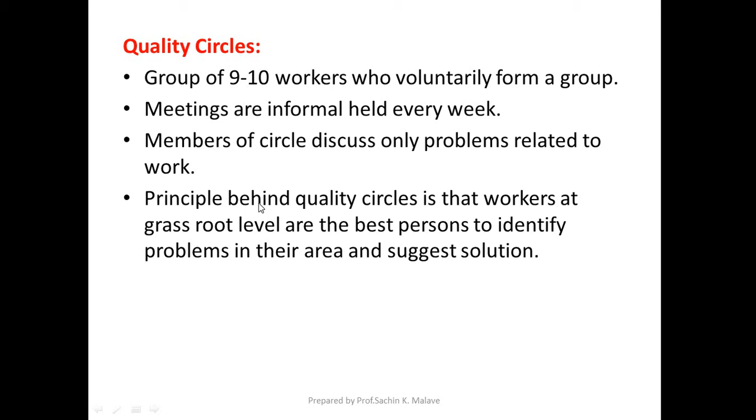We can experience this everywhere. Workers who are working can identify the problems in their area and they can suggest the solution also. So why not take advantage of this situation, why not take the knowledge from such workers? Believe me, the solutions suggested by these workers are very good solutions. Many times the solutions given by the workers are better than the solutions provided by the shop floor managers or engineers. This is the principle behind the formation of the quality circle.

As you can see, the objectives of the quality circles are to involve the grassroots workers in quality improvements and solve their problems, just as we discussed. The objective is to improve the quality.

Then, to make workers more conscious about quality and cost of the product. If the workers discuss the problems related to their work, they will also get conscious about the quality and the cost of the product. They will become more and more conscious. That is the second objective.

Third, to provide opportunities to workers to get trained in identifying technical problems and working out the solutions. You are providing the opportunity to the workers to get trained so that they can identify technical problems and solve those problems in future. They don't need to wait for the expert to come and solve their problem, otherwise production will be hampered.

The next objective is to enhance employee motivation, self-confidence and communication skills. As the workers get involved in the solution of the problems, it will definitely boost the motivation of the employee, because they will feel proud about giving suggestions, they will become confident, and their communication skill will also improve.

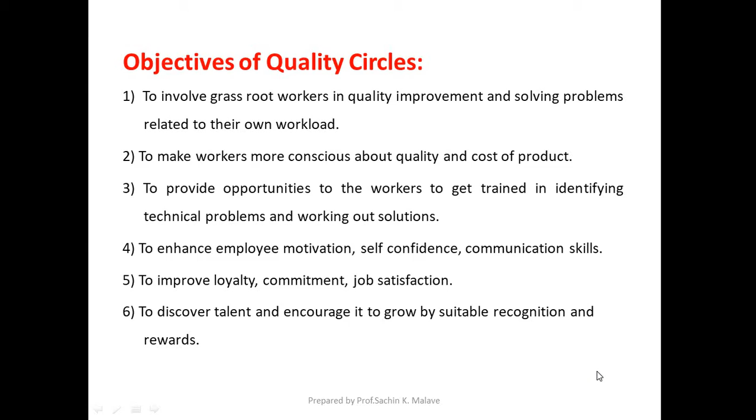Okay, CNC machine section is there. So there may be different sections, and a group of lathe machine workers may be facing some issue. They may feel a problem like whenever they are carrying out machining of certain components, they have observed that the surface finish is very bad during machining, or the tool inserts are getting broken, or they are getting worn out quickly compared to previous times. So such type of problems.

So if everybody is facing the problem, they can discuss it. What may be the reason? So they will first select the problem to be discussed. There may be a number of problems, so it's not possible to discuss all of them simultaneously. So they will decide the priority of the problems and discuss them in that priority.

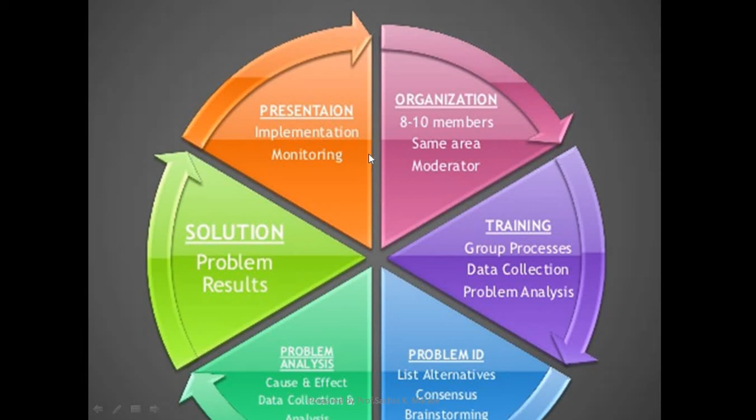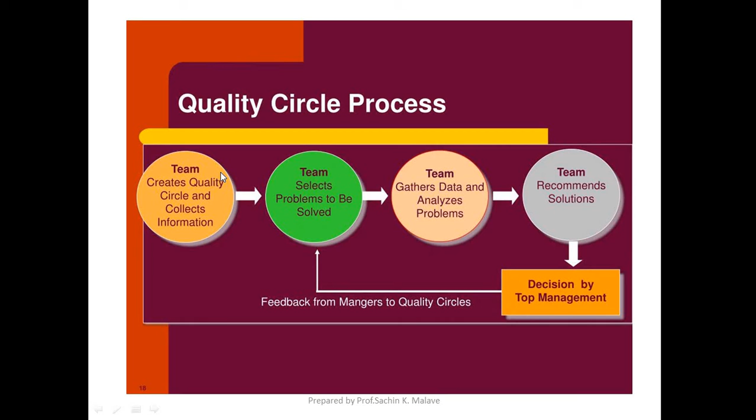Before going to the next section, we have already discussed the objectives of the quality circle, and if those objectives are achieved, then the quality circle is definitely helpful. Some of the advantages are higher quality of the product, higher productivity, lower cost, less rework and less scrap, better use of resources, leadership development, and identification of workforce talent.

But there may be some limitations of the quality circle also. So what are those limitations? One limitation is the time and cost involved in training a large number of staff members. You are supposed to give training, if required, to the quality circle members also, so the time and cost involved in such training may be too large.

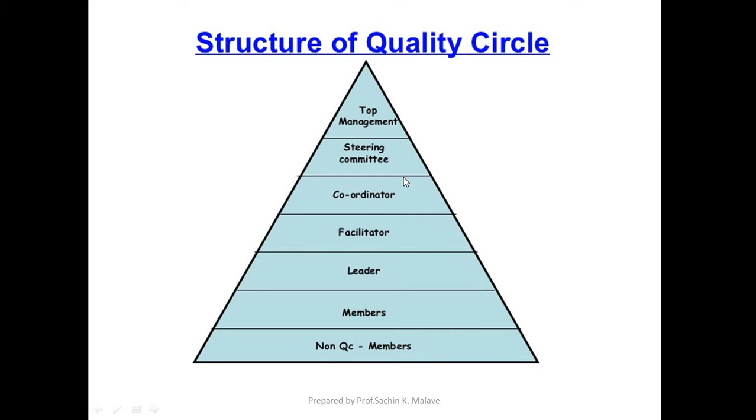So this ends the quality circle. Now we have to see one more concept, that is the importance of quality deployment, at design and manufacturing.

So here the meaning is you have to build the quality instead of checking the quality in the product or in the service. You have to try to build the quality in the product at design and manufacturing, because these are the two most important stages of product life.

At these two stages only the quality can be deployed. The majority of the quality will be implemented or built at these two stages only. So the basic objective of this concept is to satisfy the customer.

We know that if the customer is not satisfied, the part will get rejected, isn't it? Many times your entire business depends upon the quality of the product, and the quality of the product is going to build a brand name. In future, if once a brand is established, the customer will purchase the components looking at the brand only. The brand is the symbol of the quality of your product.

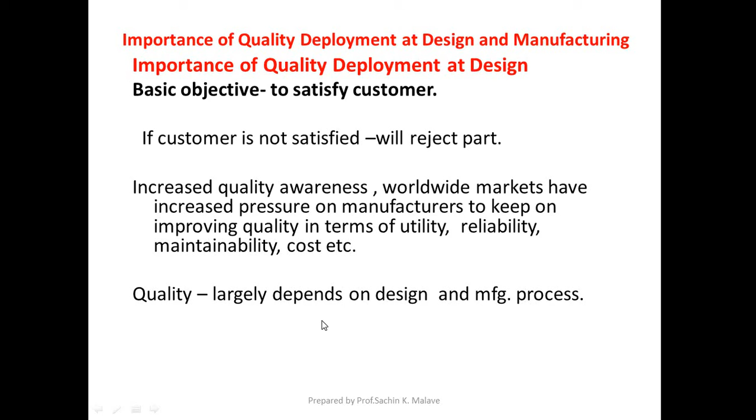Once we know that the quality is to be improved, we know that quality largely depends on the design and manufacturing process. The designer specifies the material, size, shape, accuracy and finish required for the product.

The designer is going to specify these things: what kind of material, what kind of raw material is to be used, what should be the size, what should be the shape, what kind of accuracy and what kind of surface finish is required. All these things are specified by the designer at the time of designing the component.

Because all these things matter a lot in deciding the quality of the product. Once the designer specifies everything, it is the responsibility of the manufacturing section to produce the parts as per the specifications. So if you want to improve the quality, you must begin with the improvement in design and manufacturing process.

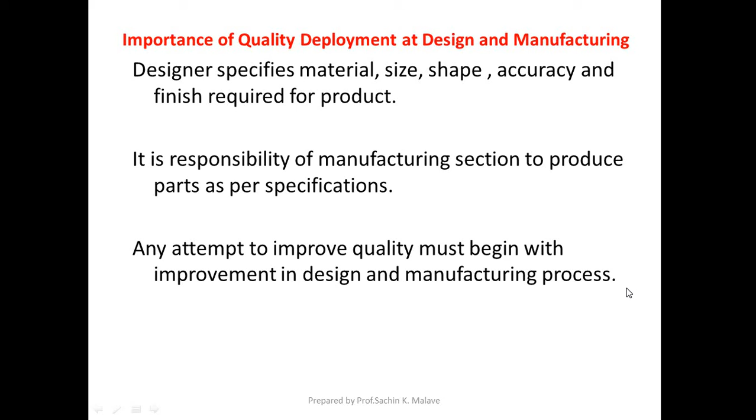Whenever you are thinking to improve the quality, you have to think of making changes either in design or in manufacturing or in both possible. So you have to first identify and proceed accordingly.

Design for manufacturing is a must for economical manufacturing. Whenever you design something, you should design from a manufacturing point of view. Whatever you design, it should be manufacturable. Don't design things which are not possible to manufacture. So focus on simplifying the design to make it producible. It is a complete approach to production of goods that integrates the product design process.

The product design process starts with the selection of material. This is the most important part of your quality improvement technique. The raw material is going to decide the function of your final product, how it is going to function, and what kind of quality is going to be built into that final product. This is decided basically by the raw materials, because these materials will impart the required qualities.

So selection of the material is very important. It is going to decide the service life, resistance to the applied load, and safety against environment. The material is also going to decide various properties, mechanical properties, chemical properties, isn't it? That's why selection of the material is a very important thing.

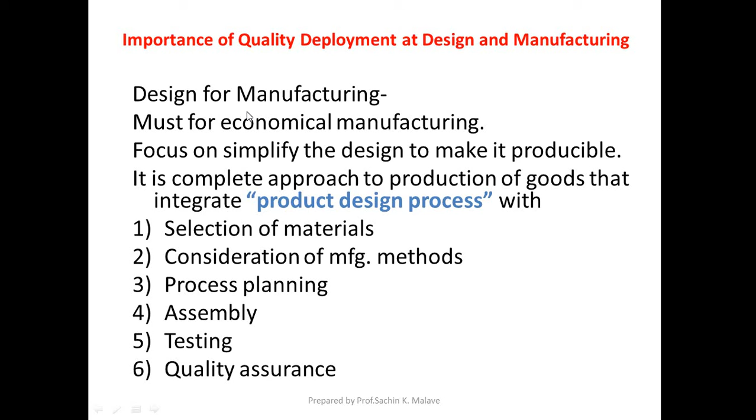Then process planning has to be done properly: assembly, testing, and quality assurance. So the product design process starts with this.

Then the designer must have knowledge of materials, manufacturing methods, machinery, and equipment. Designing is the most important step, so the designer must have knowledge of material — that's why you learn material science and metallurgy. The designer must have knowledge of manufacturing methods — that's why you study manufacturing technology, workshop technology, production technology. The designer must also have knowledge of machinery and equipment, because the designer is going to decide everything.

What kind of material is to be used, which manufacturing method is to be used, what kind of machinery is required — because machinery is going to decide what kind of quality will be produced. Process capability is basically related to the kind of machinery and equipment used for manufacturing as well as inspection. So the designer must have knowledge of all these areas.

Some design principles that should be implemented: the design must be simple, it should be possible to manufacture. As I told you, whatever you design should be producible. Sometimes whatever you design is very difficult to produce. It should also be simple to assemble, disassemble, service, and recycle. These are the basic principles of design.

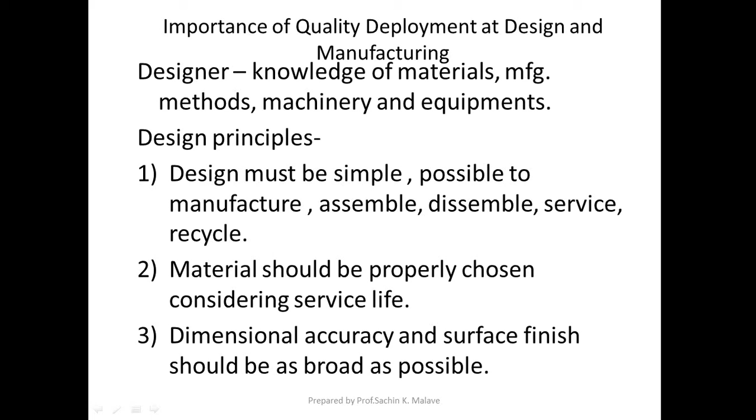That was related to the importance of quality deployment at design and manufacturing. Now, initial planning for quality.

The basic objective is decided in advance. Whenever you are planning for quality, the basic objective should be decided in advance. Planning means you are deciding in advance — what is to be decided in advance? What to do, when to do it, how to do it, and who is to do it. That is related to planning.

So what activity is going to be carried out, when that activity is going to be carried out, how that activity will be carried out, and who will carry out that activity — all these things have to be decided well in advance.

So you review the product design and process design. Whenever you are planning the quality, you review for the product design and process design. Under this comes identification of the product and process, review for the product design and process design, identification of the product and process, and analysis of the process flow. We are going to see all these things in detail, and understand how they are related to quality.

Understand the interrelationship of process variables, determine process capability, make the process mistake-proof, validate the measurement process, and plan for operator self-control. We will see these things one by one.

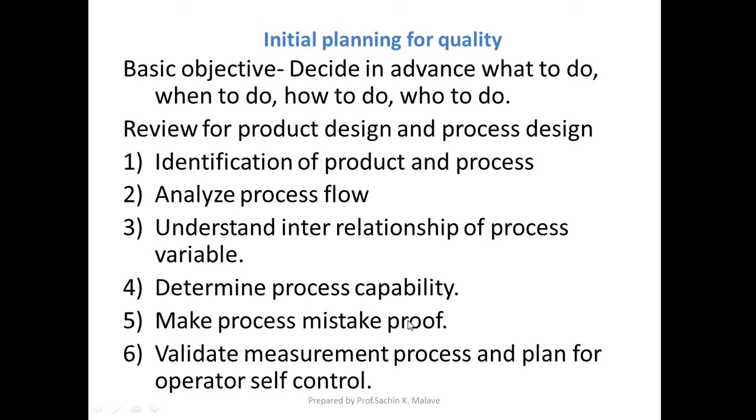What is the meaning of this? Reviewing the product design and process design means the focus is on how adequate the field performance is — you are going to check whether the field performance is adequate or not. So how will you decide, how will you identify this?

Identify the key product and process characteristics. Key characteristics mean important characteristics. So if you say you want a quality product, what kind of characteristics are you looking for in that product? Those characteristics are called key product characteristics or important product characteristics.

You have to identify such product characteristics. The customer is going to express his expectations, but the expectations of the customer are not in terms of the product characteristics. So it is the duty of the designer or engineering organization to convert the expectations of the customer into key product characteristics. So the organization has to decide what kind of characteristics will be required so that the product will satisfy the needs of the customer.

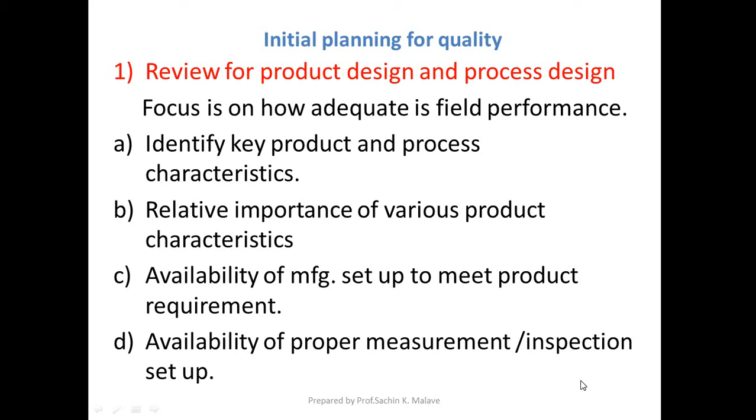Check whether the special needs like handling, transportation and storage are available with you or not. Sometimes special handling, transportation or storage requirements are there, so check for those special storages.

Then material control, segregation, identification and traceability. So you have to discover whether segregation facilities are available with you or not. There should be proper identification and traceability, so that even if some kind of failure takes place, your organization should have the mechanism to identify the defective components. Traceability should be there.

Special skilled personnel — check whether special skilled persons are available with you or not, that is to be checked.

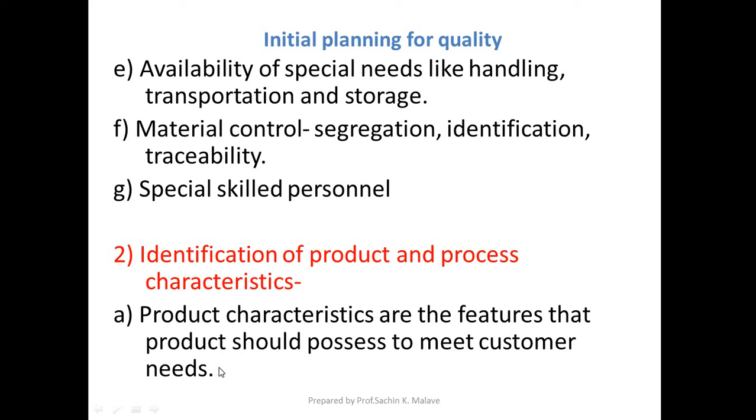Then identification of product and process characteristics means what? Product characteristics are the features that the product should possess to meet the customer needs. So I briefed you on what is the meaning of the product and process characteristics — these are the features that will meet the customer needs. If these features are included in that particular product, the customer will be satisfied, or the needs of the customer will be met.

So how to identify such process characteristics? These process characteristics will be identified using inputs from market research. Market research can be carried out by various techniques, and from that market research analysis you can find out what the customer needs. Then quality function deployment — what is QFD.

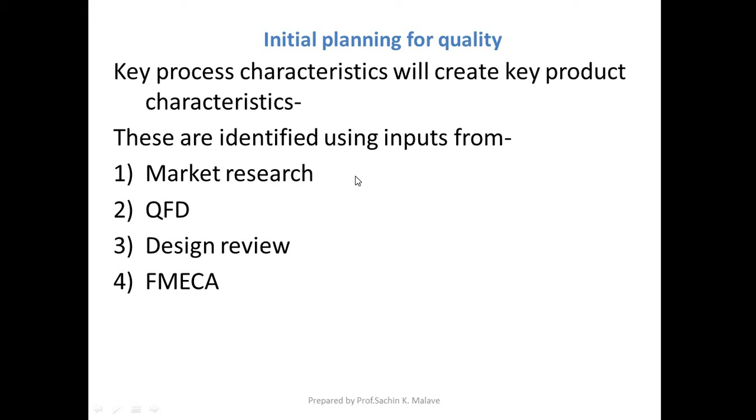From QFD we can get design review. If we review the design, you can get the key characteristics. Then FMECA, that is failure mode effect criticality analysis — from this analysis also you can get the important characteristics which are a must. Key means must characteristics. If these characteristics are installed in your product, the product will meet the customer needs.

So that was the second thing. Analyze the process flow — what is the meaning of analyzing the process flow? The planner, whoever is planning the activities, will use the flow diagram to divide the flow into logical sections called workstations. A product, whenever you are manufacturing it, is going to pass through a number of processes, and each process will be carried out at some workstation.

For example, take the example of casting. For manufacturing casting, various processes are there, right from the sand plant. If you are making a sand casting or green sand molding casting, the sand plant is one workstation. Then it will come to molding, so the molding section is another workstation. Then there is a pouring section, so that will be another workstation.

Fourth is melting, so that will be another workstation. Fifth is fettling, another workstation, and so on. So the planner uses the flow diagram to divide the flow into logical sections, called workstations. So for each station the planner is going to prepare a formal document called a process sheet, prepared for each and every station.

So the process sheet contains the standard operating process. If you take the example of the molding workstation, there is a process sheet for it. For the sand plant there is a process sheet. For the melting section there is a process sheet. For the pouring section there is a process sheet. So for each workstation a process sheet will be given.

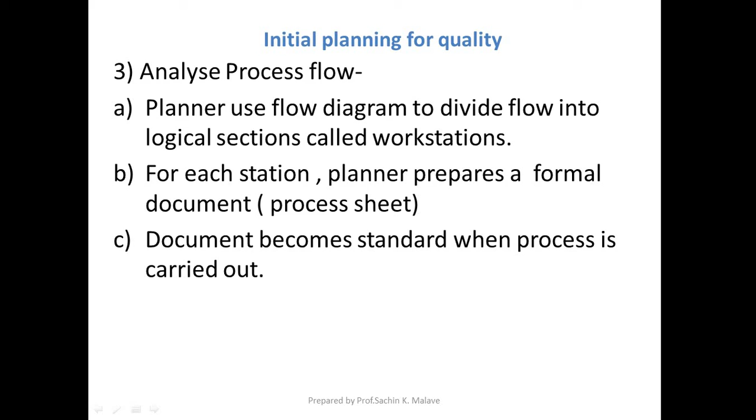Then understand the concept of interrelations of process variables. There are so many process variables, so we have to understand their interrelations. To understand the interrelations of process variables, concepts like DOE (Design of Experiments), Taguchi approach, and Six Sigma are applied. These are some of the techniques using which you can understand the interrelationship of various process variables.

So if you take the example of temperature, what do process variables mean? If you vary one variable, there may be a change in the performance of another variable. Let us take the example of casting again. In that casting, if you increase the green compression strength of the sand, you have changed one variable. What is the variable? Green compression strength of the sand.

But if that variable is changed, its effect is on the permeability. Its effect is on the mold hardness also, isn't it? So if you increase the green compression strength, the mold hardness will also increase, but the permeability will get reduced. So if you change one variable, there is a change in other variables also, and it will influence other factors too. So such interrelationships have to be studied. You cannot consider only one side.

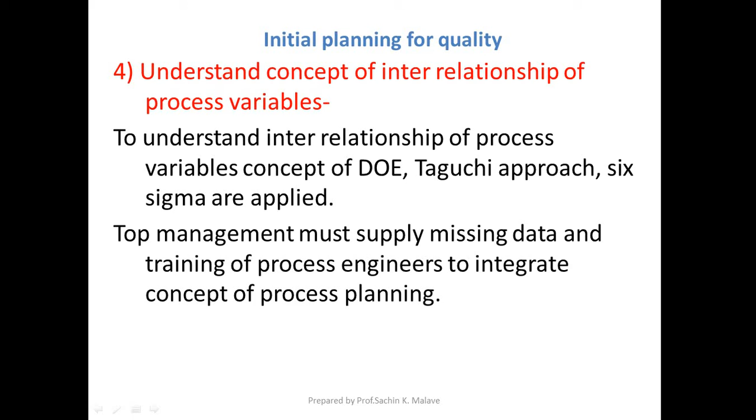Then this organization has to determine the process capability. We are going to study this in detail in unit number 5. What is process capability? Whenever you are saying that you want components of a particular quality, first you have to carry out the feasibility study.

You have to check whether the quality desired by you is achievable using the available resources. If you are saying that you want super finish, the surface finish of your part should be very high, less than 0.005 micron, RA value should be less than 0.005, it may not be possible if you have been provided only a lathe machine, because the lathe machine does not have the capability to produce components of such high surface finish. So process capability for each process has to be determined, and accordingly the designer has to specify which machine, which process has to be implemented.

So for that you have to determine the CP and CPK indices. These are the two indices, and we are going to see this in detail in unit number 5. CP is called the process capability ratio, and CPK is called the process capability index.

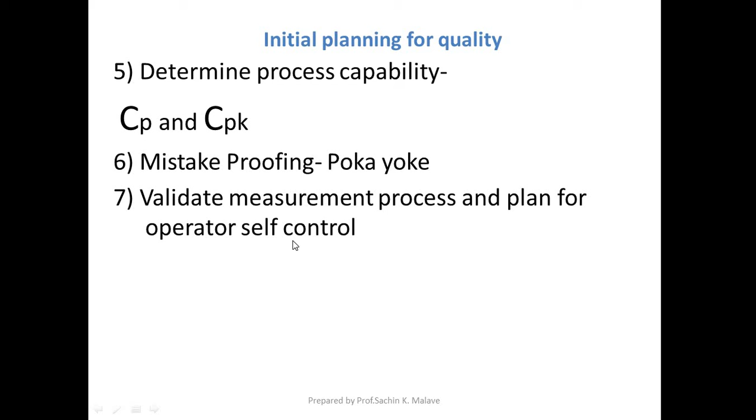And the last one is to validate the measurement process and plan for operator self control. So whatever measurement process is there, you just validate it, confirm it with some higher advanced measurement techniques, and plan for the operator self control. So what is this operator self control? We are going to discuss it. So we'll stop here.